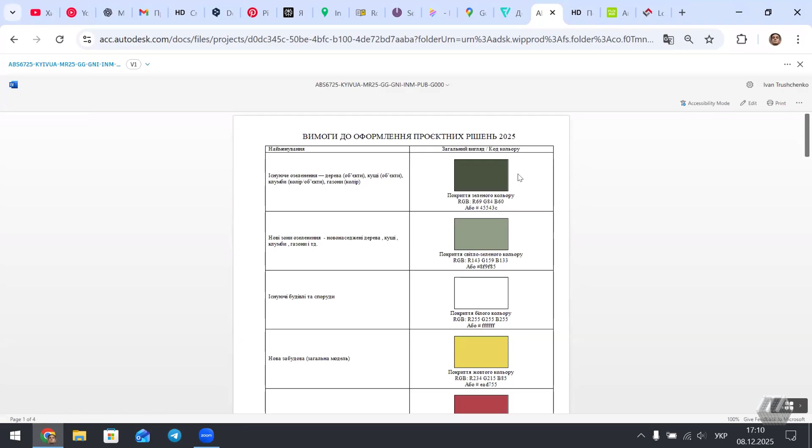Work on the project was accompanied by the creation of additional rules, such as the color scheme. I would like to show you these rules. Here we have color rules which students were using to format their files.

Next, there were rules for naming files and the culture of maintaining the working files in the work process itself. So here we have some rules for naming, and as you can see, for example, we can open some folders, and here we have this naming as an example. So let's move further.

Now that we have reviewed the basic structure of the work process, I suggest we look at the overall results. Here I will show you the accomplished model of our work. We will start from the very beginning.

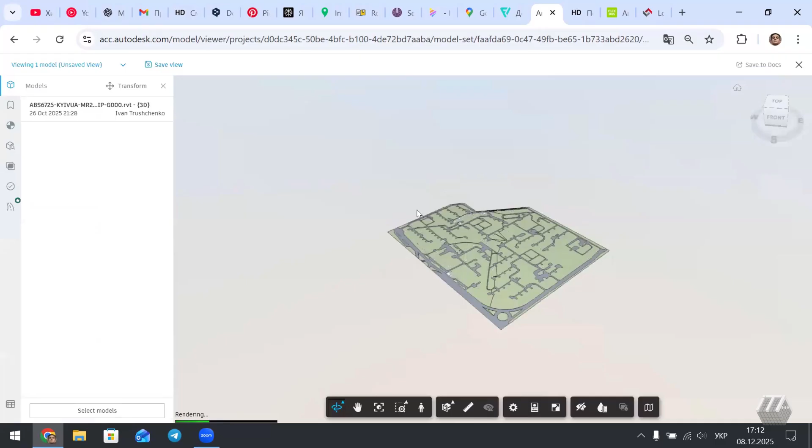Let's start with the starting point, where we have a model of the current state without changes. So we have there the situation itself which we have in real life - this is our district, the stage from which we began our work.

The next stage of the work for the groups was to identify problem areas and propose changes. We started with the demolition of problematic elements, problem areas that are proposed. I will show you this as an example - problem areas proposed for demolition are highlighted there in red color.

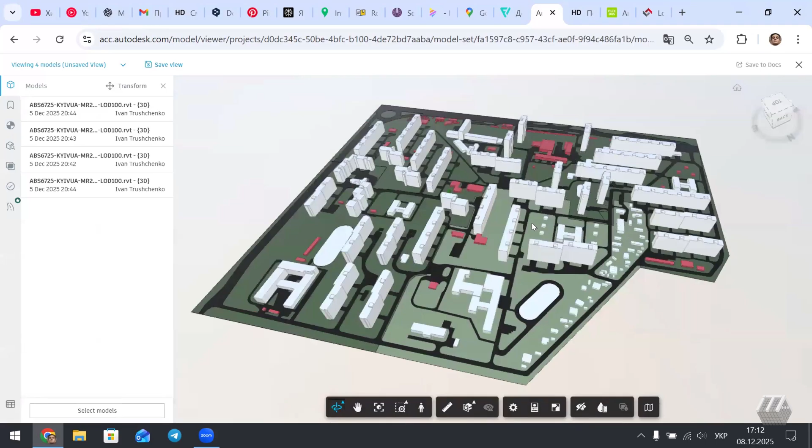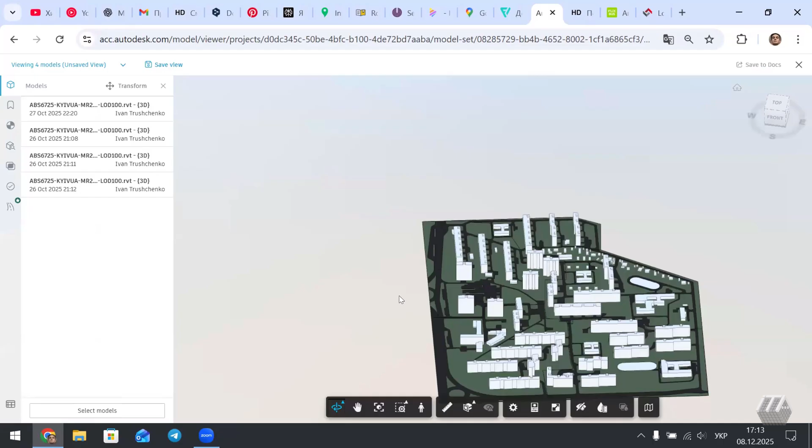This is our district again, with the problematic buildings highlighted in red. In the next file - it's taking some time - we see the situation still without changes, but already without the demolished buildings and structures, so without the red buildings, just the situation.

After this stage, each group began working separately. I suggest briefly reviewing the general models, and my fellow students will tell you about the details further. Let's start from LOD 100. What is LOD 100? This is a model that has not yet been agreed upon.

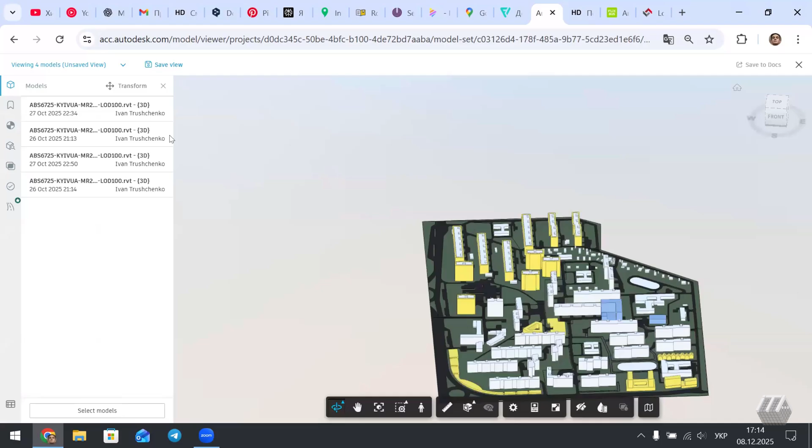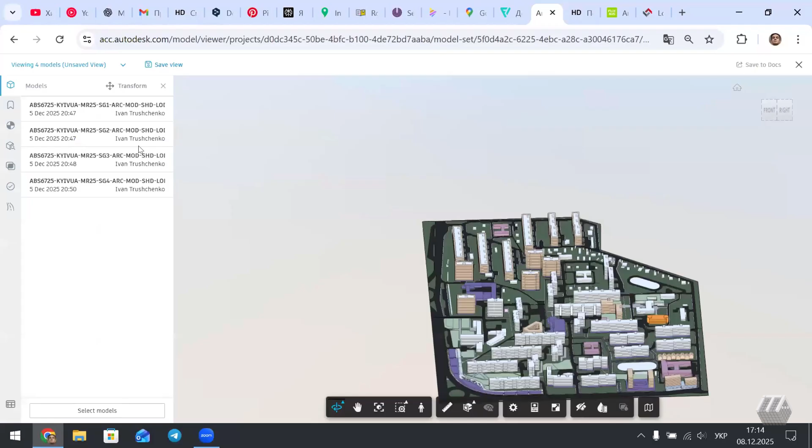At this stage, rules for maintaining working files and color schemes were introduced with minimal detail. The next stage was LOD 200. LOD 200 is an already agreed model with a medium level of detail and functional proposals.

Different color means a different functional proposal, which you can see in the rules document. And the last stage is LOD 300. This LOD is a fully debugged model with its own classifier and calculation of proposed changes.

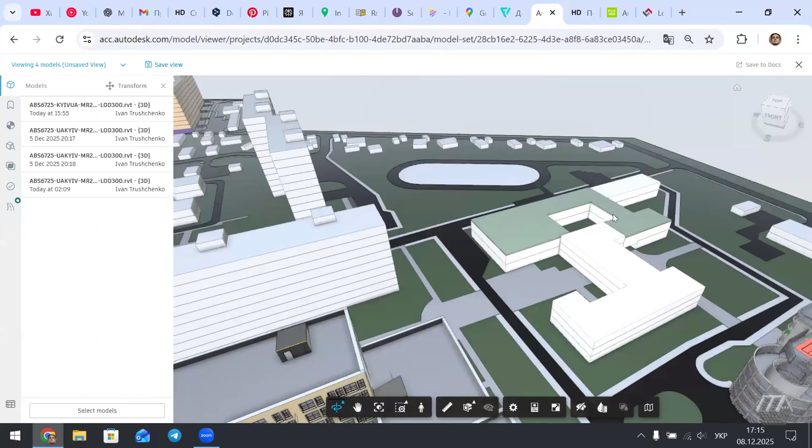I will show you the detail of these elements for LOD 300 of different groups. These are the structures that were in the work process - like this, and like this. And about the calculation, let's talk about them.

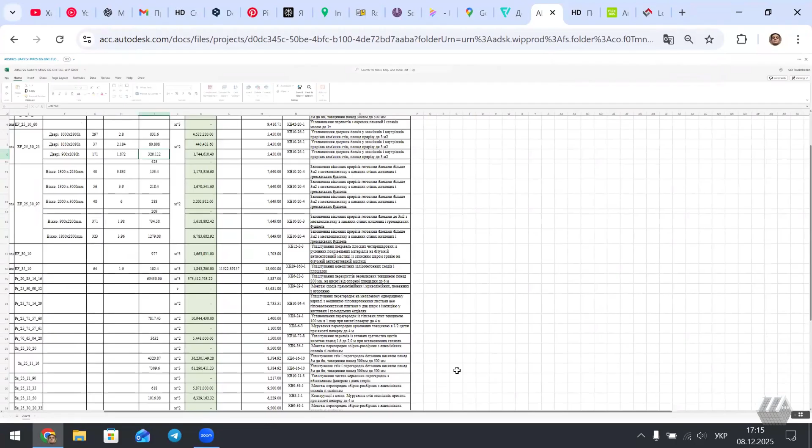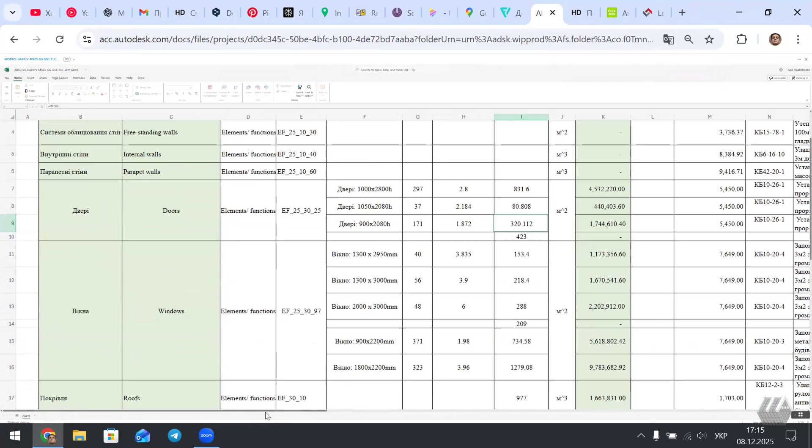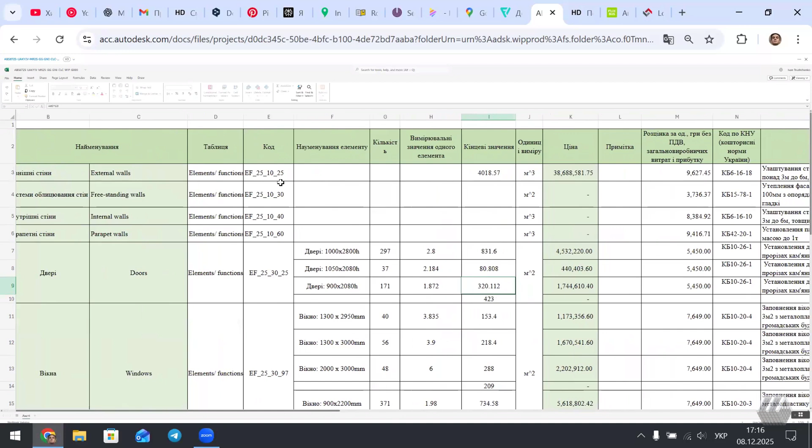So we have there the names of our elements, the code naming of these elements, and these elements we can see in the files. The calculation is in these separate files, where you can see both volumetric and numerical data, as well as the names of the corresponding classes of model elements, as I said before.

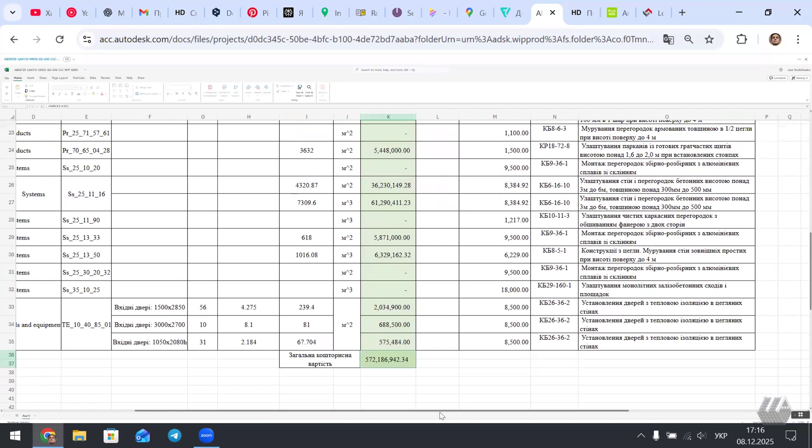And in conclusion, we have the overall volume of our calculation, and like this we have some conclusion. Yes, for this, in my words, that's all. My colleagues will tell you about more details of this project.

Okay, and who will be the next? While we are waiting, I want to tell you that this work was done in 10 lessons, and it was a little hard for us because we tried to work on such urban projects with first-year students. Masters have more lessons, near 14 lessons. Last year we worked with this group, with Makariv, and they worked on public spaces. Because they had that experience and understood BIM technology, we shortened the number of lectures and made more practical lessons.

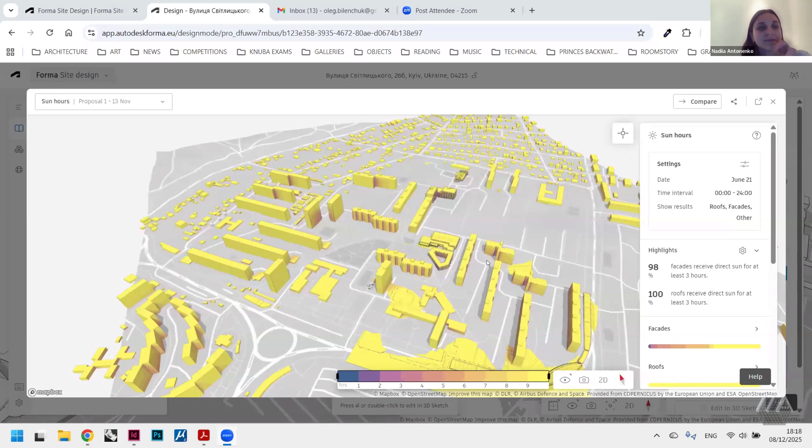Before we switch to our site, I wanted to demonstrate our quick acquaintance with software called Autodesk Forma, which was kindly introduced to us by Dmitro Makarov. Thank you very much, Dmitro. It's really quite an impressive piece of software. What's so particular about it is that it does really complex calculations rapidly, instantly, and it's a browser-based application, so you can open it in Chrome, Microsoft Edge, or whatever.

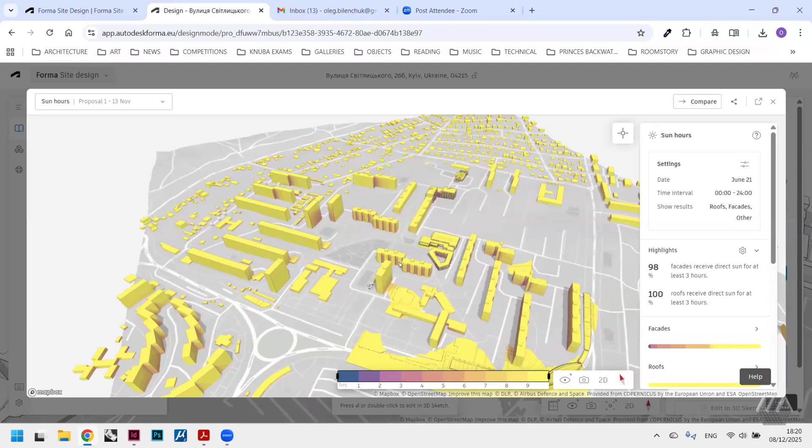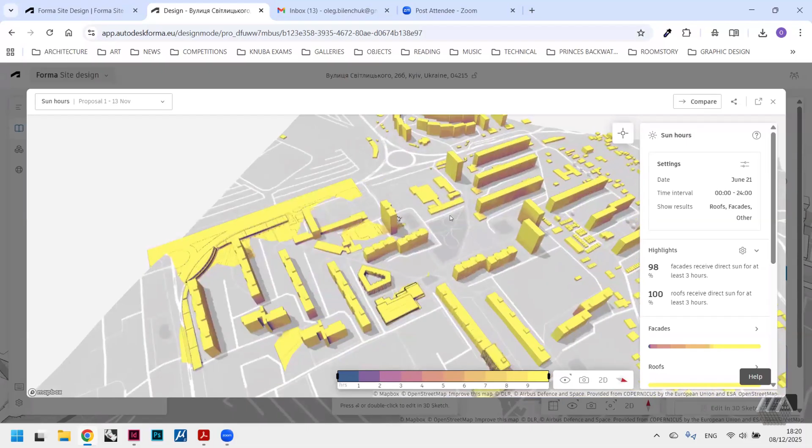We tried to locate our overall model as precisely as possible in order to make daylight simulation and wind simulation. What's on the screen now is basically a 3D model of all 4 sites, so it's a cumulative proposal. You see all the buildings. There are little bugs, but it's just to get the gist of how things behave climatically. It's a great tool, I think, to really test things from the point of view of daylight, wind loads, and other things. It has a very deep specification engine. You can actually specify functions, which we didn't do.

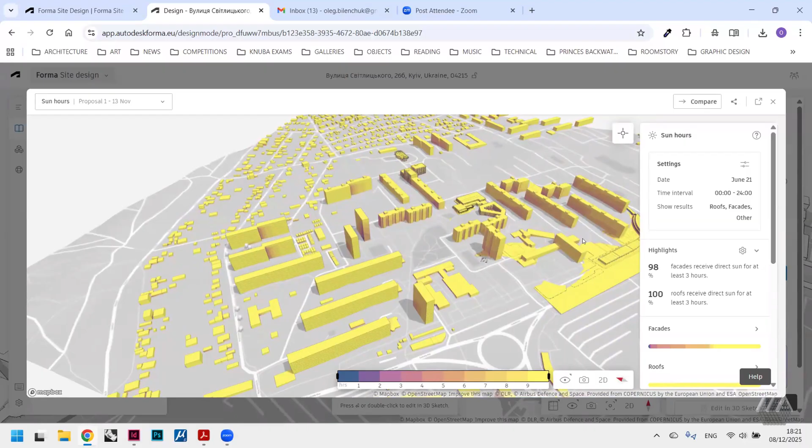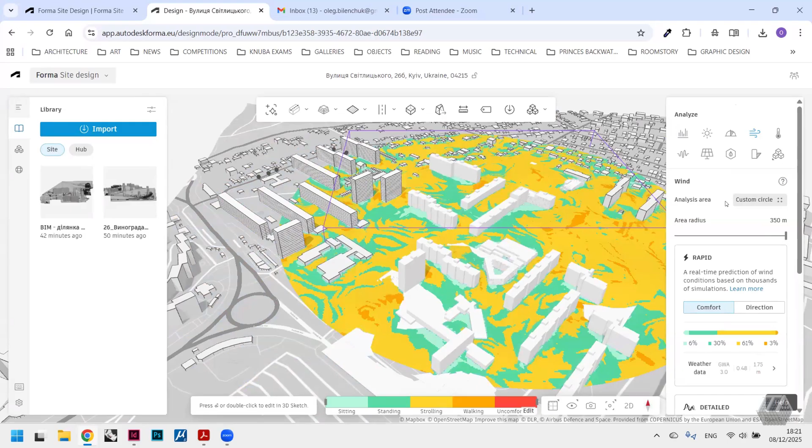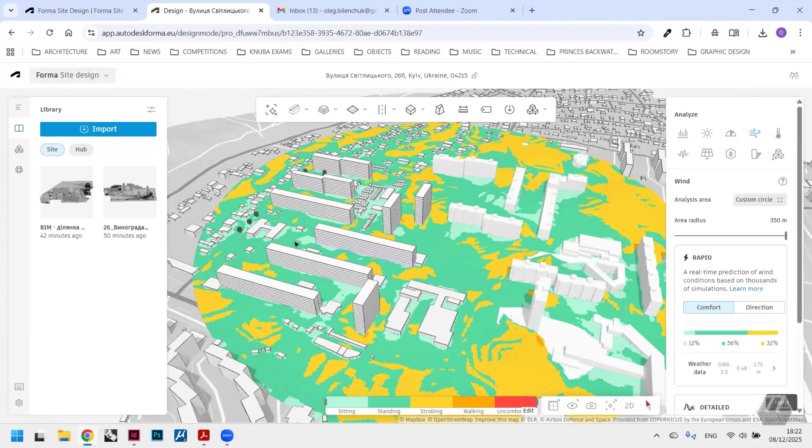So we only ran sun hours data analysis, and then I'll quickly show the wind analysis. You can see it calculating live, basically, and you can set a custom radius for the calculation area. It's very easy to relocate it and recalculate the specified piece of land, and instantly get data. So it really allows you to test how things are in relation to the proposal. Since we didn't change much of the morphology on the existing site, we weren't really using these two modes of calculation at their full potential. So I guess in our case, we would have to dive deep if we had more time to specify all the functions and really get all the metrics. But yeah, this is how it is at the moment.

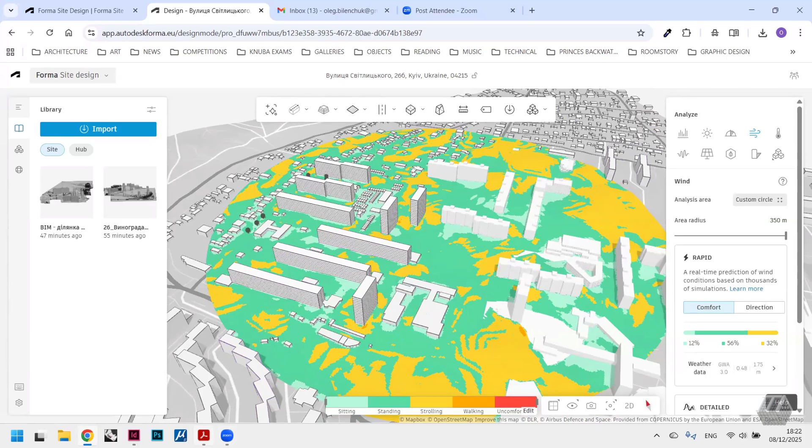So we've got two principal calculations. Now I'm going to pass the word to Victoria. She will start with lot number 1, with the proposed ideas and concepts. One second.

Hello to everyone. I can start. Do you attend? Okay, it's fine. In the meantime, I'm going to take over.

Our presentation is split into 3 principal chapters, which are where, what, and how. In where, we talk about the site, found historical maps, and give a gist of the general context. In what, we demonstrate the taxonomy of the buildings, basically the body of buildings which we've worked on and focused on. And in how, we present 3 key concepts to our project, which are the concept of wrapping, the concept of stitching, and the concept of superimposition.

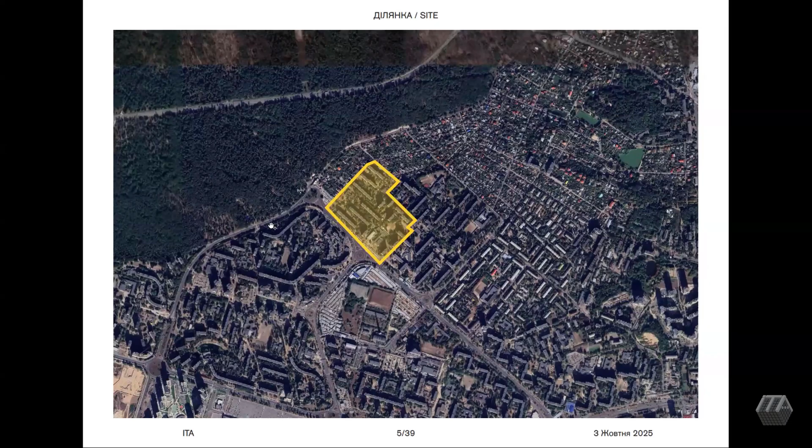Here you can see the enlarged satellite image of Kyiv. What's peculiar about the site is that it's really at the edge of the city. Just to locate things, here is the central historical part, this is Podil, and this is Vinohradar. So it really has this edge condition. Beyond it, it's just forest, basically. Here's a bit of a zoomed-in image of the site highlighting our sector.

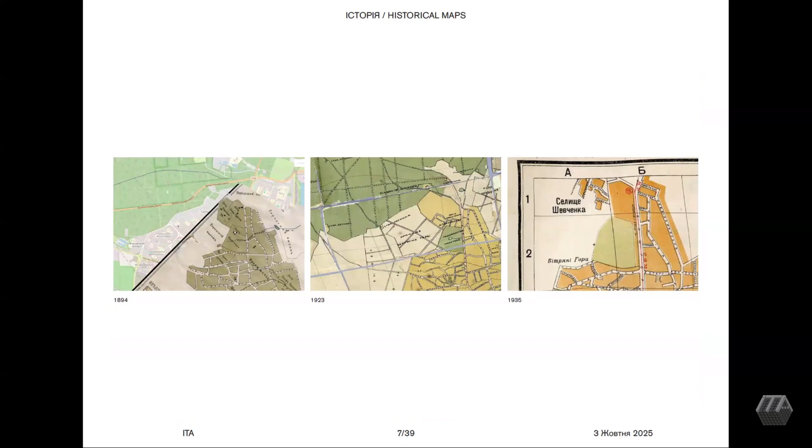And 3 historical maps showing 3 periods of this site's development, which was really a rural territory. Not much was going on. It was a mixed kind of land, sand, and land for cattle and fruit gardens. Then during the Soviet period of mass construction, it really became, let's say, a factory for a new kind of mass-produced urban development. All the residential blocks had a monofunction, which was exclusively housing. So there was housing and infrastructure, civic services.

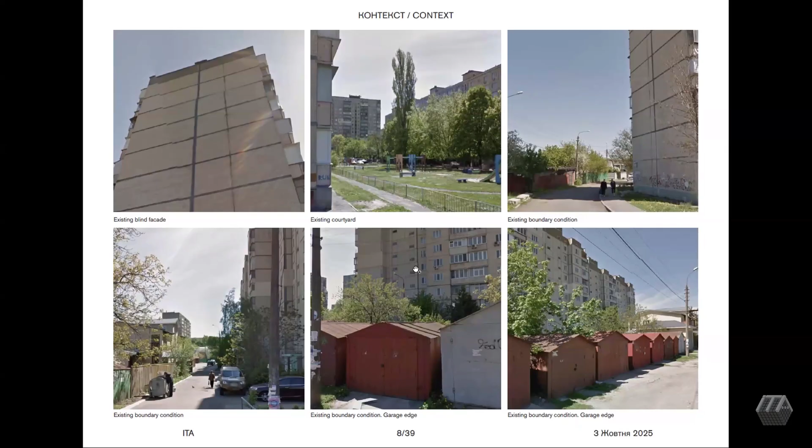And then, opposite to the Soviet project, there is this modern project which is very similar, has a very similar scale.

It's just using more contemporary ways of building buildings, taller, bigger, but with slightly more infrastructure, civic infrastructure.

What's also interesting about Vinohradar and other similar houses across Kyiv is that, if I remember well, at some point during 2014 or 2016, there was a law that allowed residents to quickly change function from residential to commercial, and people really took advantage of that, and it became a tendency. So ground floors started quickly transforming into what was thought necessary there, which is on one hand kind of an entropic thing, but out of necessity, I guess.

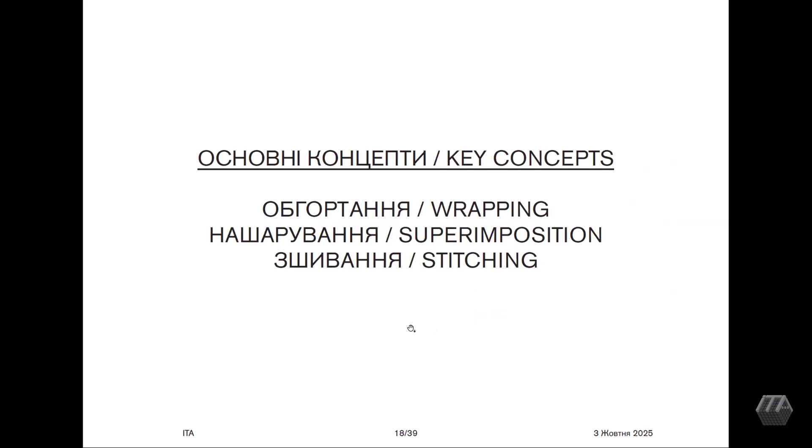Our key concepts were wrapping, superimposition, and stitching. We looked at the glorious project by Lacaton Vassal, the transformation of 530 flats.

Something wrong with your sound? We don't hear. Sorry, I beg your pardon.

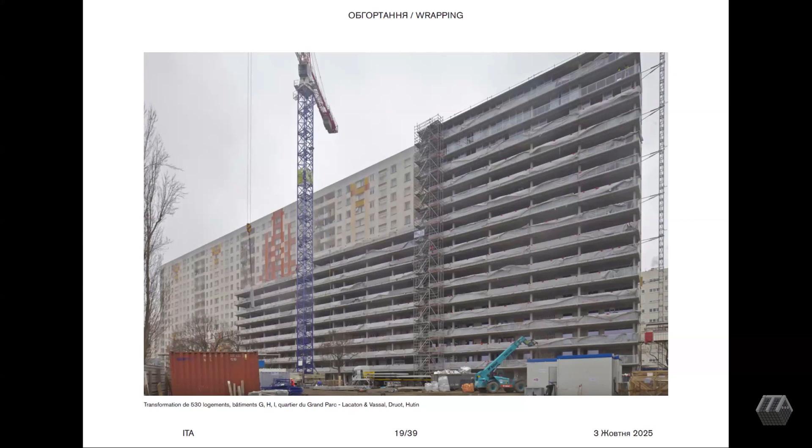Transformation of 530 flats in Quartier du Grand Parc. Some other photographs of this incredible project. It was basically a Plattenbau building, which was brilliantly renovated by French Pritzker Prize laureates.

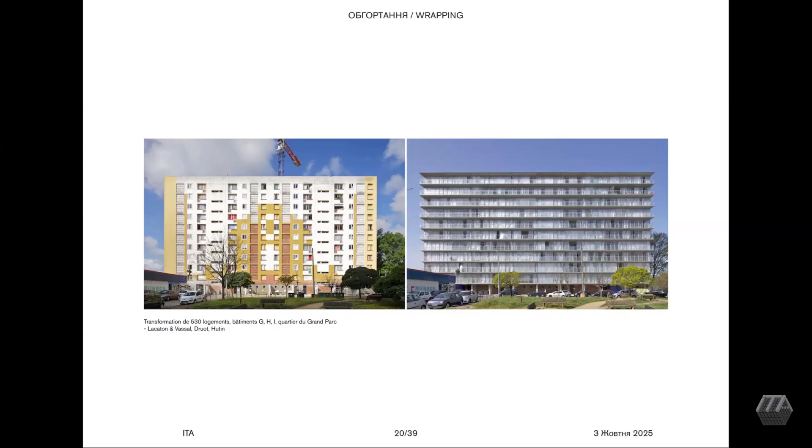And what they did, they basically added the facade, but at the same time, to my mind, they removed it by this gesture. Because here you can see the original facade, which has this composition of windows and other elements, so it has a really strong facade presence. Whereas Lacaton Vassal really abstracted the facade to the most radical level, and they turned the facade into a space, which is really a beautiful and poetic idea.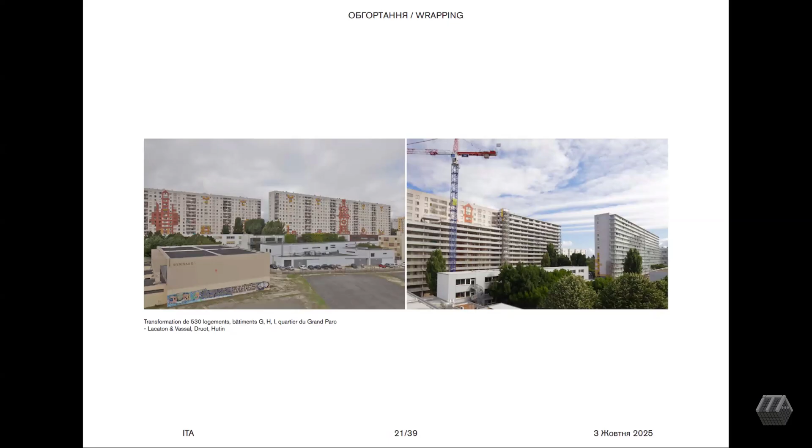And to this extent, we think of this project as almost like a paradigm of what to do with this type of house. Of course, it requires state funding, etc., and climatic assessment, but anyway, I think it's a brilliant precedent.

So we tried to come up with a similar idea, but with a slightly different treatment, because the war really impacts everything, literally. So we couldn't avoid thinking about this factor as well.

Unfortunately, this type of building is considered to be quite unstable structurally during an impact. So we thought, what if this second skin, this added space, could also serve the function of protection to some extent, and the possibility to share energy.

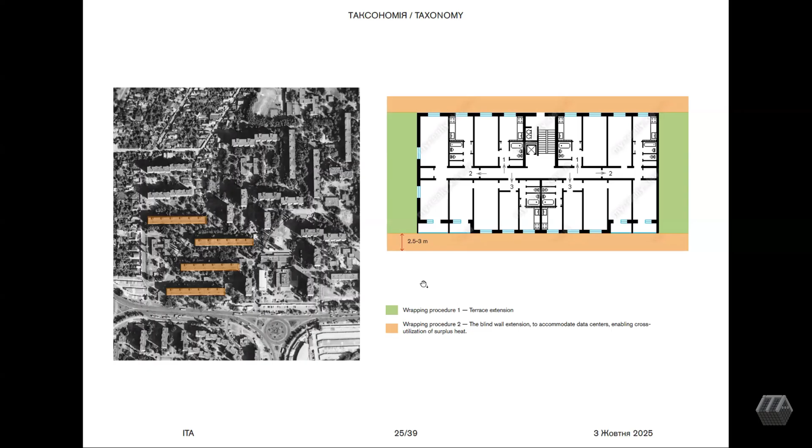So on one hand, you have a blind wall, which is usually used in this context as a space for adverts. So instead of using it as a space for adverts, we propose to turn it into something that could accumulate energy, something that could be beneficial both for private interests and for people who live in these houses.

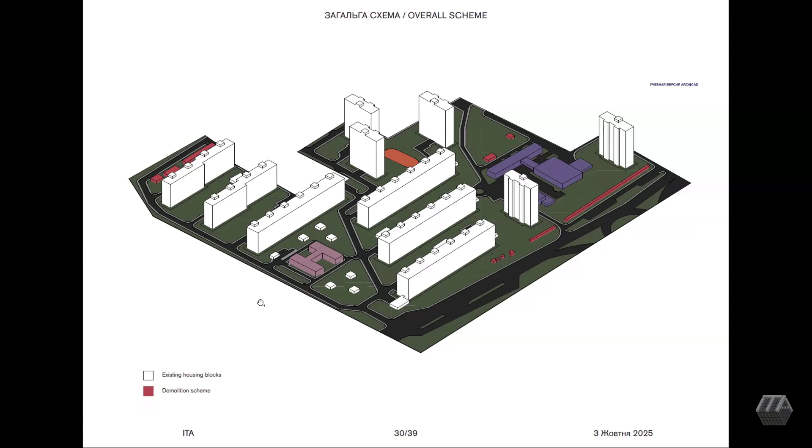And this is the overall scheme showing the existing condition, then a partial demolition scheme, which touches mainly chaotic and illegal structures across the avenue, and some garages. And then the overall proposal scheme, which shows the idea of wrapping with an additional structural grid.

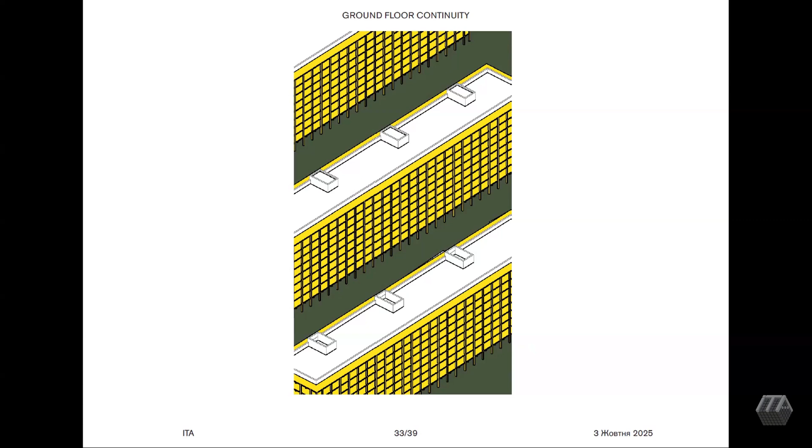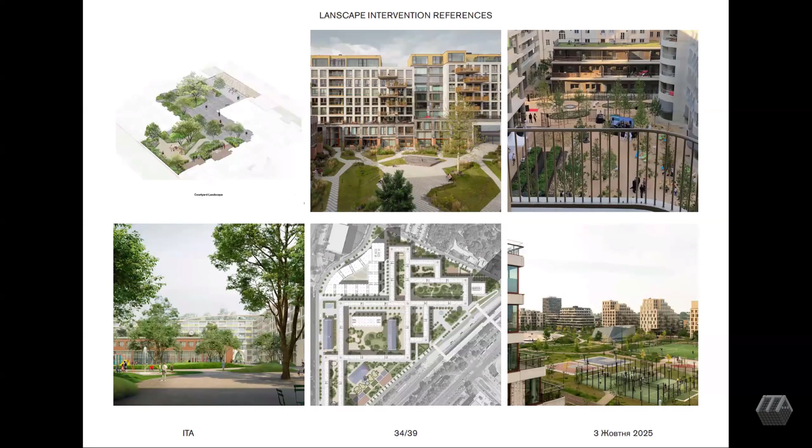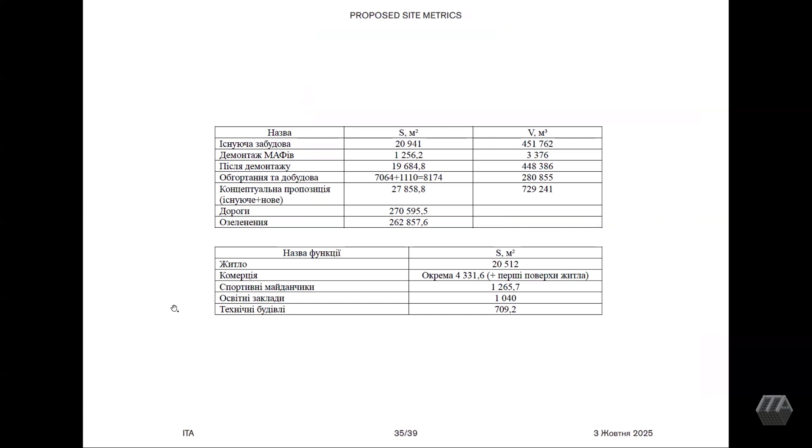And then coming to the idea of stitching, which was again addressing this notion of safety, so that people do not see Plattenbau anymore as something dangerous, something that could collapse easily, but something that has this character of support.

Unfortunately, we couldn't come up with a concrete calculation because while liaising with a structural engineer, he told us that in order to calculate impacts done by explosions, you need a super powerful computer because you work with fields of particles and energy, and it really takes enormous time.

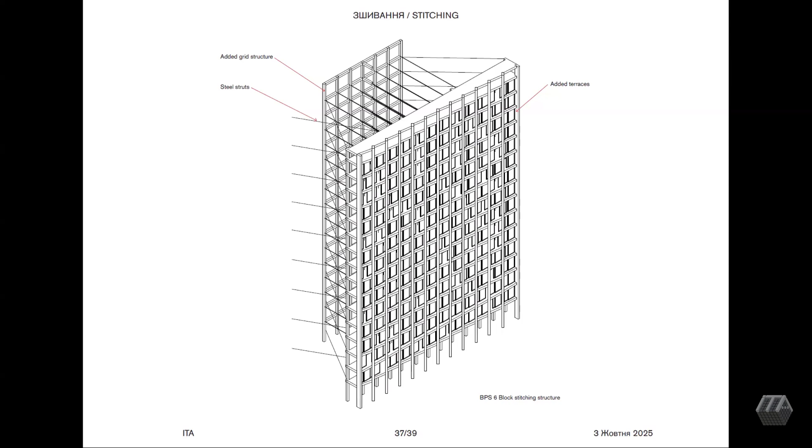But he said that in theory it could be a very interesting idea, and even pushed further into the idea of a car-like airbag system, so potentially it could have some pneumatic elements to it. But again, it's a project within a project, and although it takes a long time to really prove its viability, it is quite viable from our and the structural engineers' point of view. Of course it's not instant, which is probably a bad thing. But anyways, we never know how long these buildings would last and how long the war would last.

So this is the assembled look of the outer structure. Here you can see these vertically stacked data centers, or something that could produce surplus energy and make cross-utilization possible, on the example of the BPS 16-story tall block.

And then the last concept is superimposition, which is about the commercial part of our site. What's particular about urban planning in those days is that it was radically different from European thinking, which evolved from medieval tradition, where commercial functions and merchants were on ground floors. Obviously this is very alien to Soviet thinking, and especially to Plattenbau.

So they had this idea of a community center, which wasn't really a community center in our understanding. It was just a place where all the services were, like if you need to stitch your shirt you go there, there was a post office, a hairdresser, so it's basically a service center. Nowadays it evolved into a place where people just rent out spaces to provide the same services. Our idea was to keep all the functions that are there, because if they are there, it means tenants survive, they're able to pay rent, and tenants and residents really use those services.

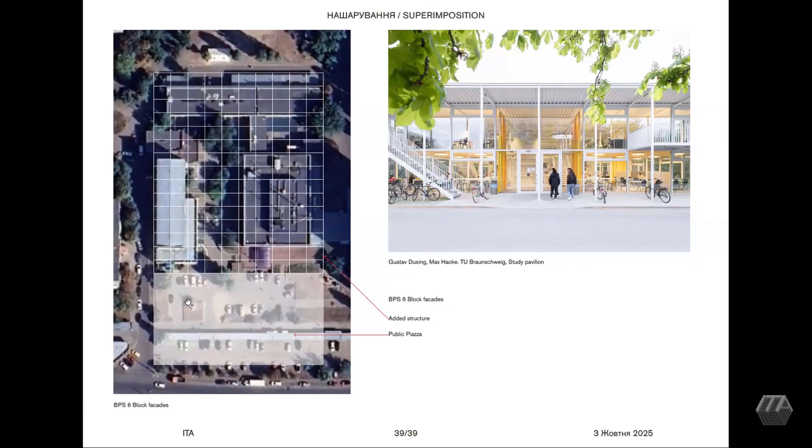So our idea was just to renovate using, again, this concept of a grid, but this time not concrete, but steel, something very elegant that could be superimposed literally on the existing structure and provide a new layer. So basically to use the roofs and to rethink these inner garden bits, this alcove, and to turn this chaotic parking lot area into a public piazza. Thank you for your attention.

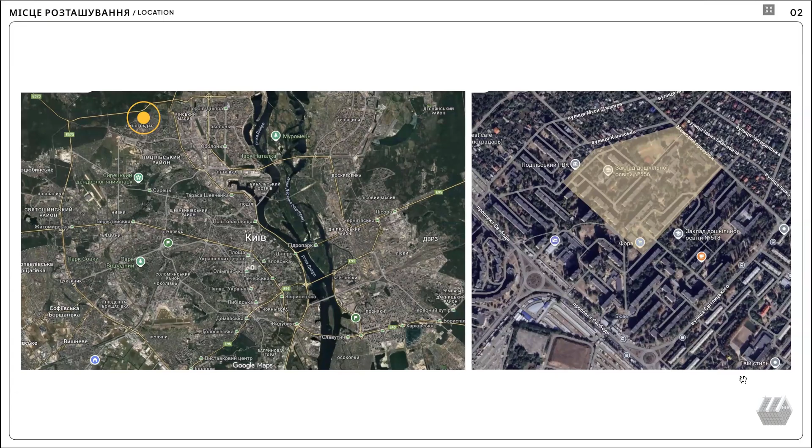So let's start. We have worked on Vynohradar residential area located on the northwest outskirts of Kyiv. The photo on the right shows the site my group worked on. Our site mainly consists of Soviet-era prefabricated apartment buildings, 2 schools, a kindergarten, and a stadium.

After analyzing the territory, we found a shortage of parking spaces and public services. Therefore, on the demolition plan, we proposed removing the annexes that currently house the one-story art school, as well as several technical structures. This allows us to build several new residential sections with a public use podium and a separate multi-story parking garage.

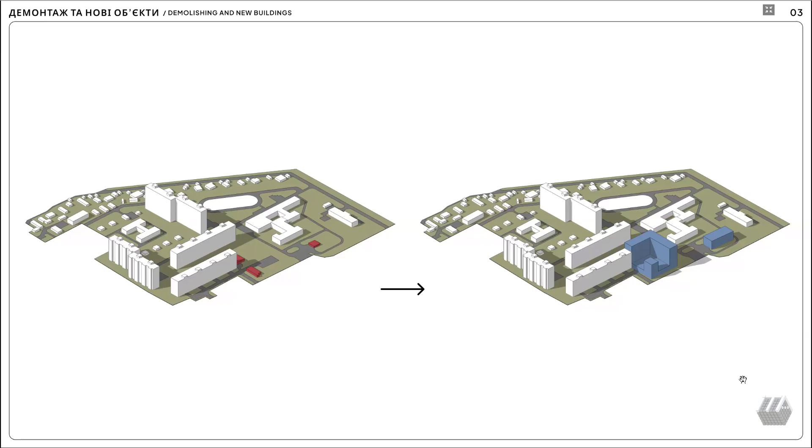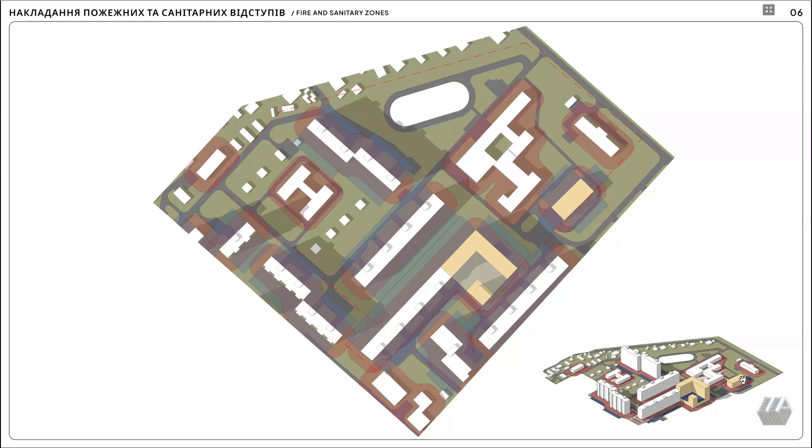According to the cadastral map, a large part of the area is occupied by educational institutions. So to compensate for the school territory used for the new parking, we propose creating an accessible green roof on top of the school. The kindergarten area cannot be significantly reduced, so it remains unchanged.

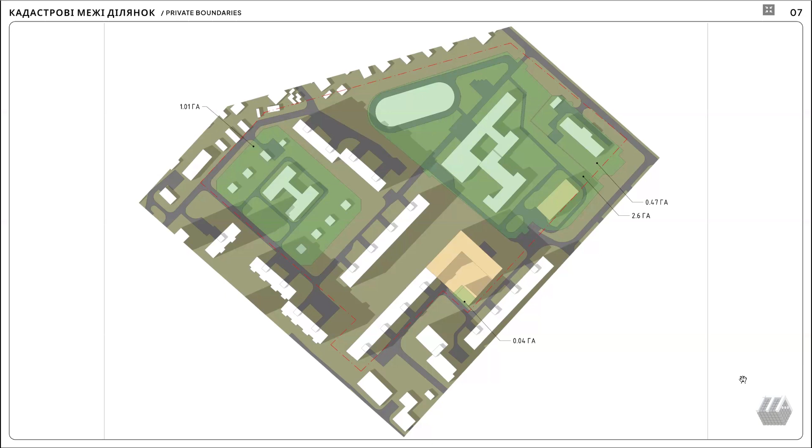Considering all site restrictions, we can build approximately 21,000 square meters of housing with integrated public facilities and 3,000 square meters of parking.

For the pedestrian and transport circulation plan network, we did not change the transit routes locals used to. When analyzing walking paths, we found no non-functioning paths, so we proposed a sustainable design solution, only optimizing the landscaping and adding more greenery.

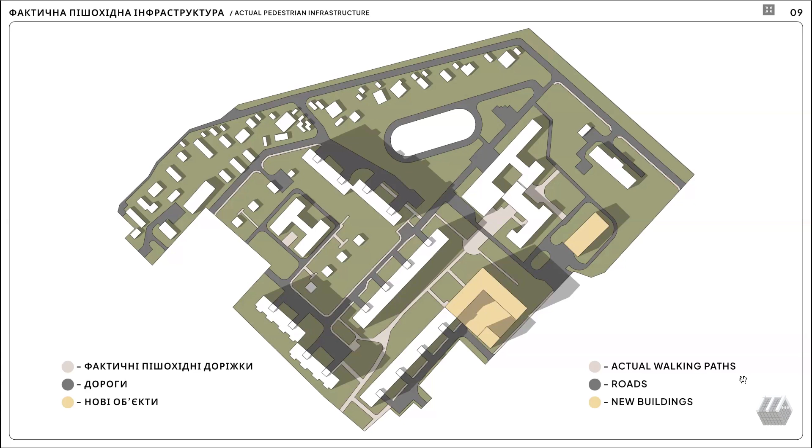The functional program includes 3 residential sections with accessible roofs, a podium with commercial spaces to meet local needs, and a courtyard for the residential sections located on the podium roof. Office spaces are on the ground floors under the residential block, a 5-story parking garage, and renovated cultural facilities, including the art school expanded into an art gallery.

We use green roof systems to reduce stormwater runoff and lower cooling costs in the summer.

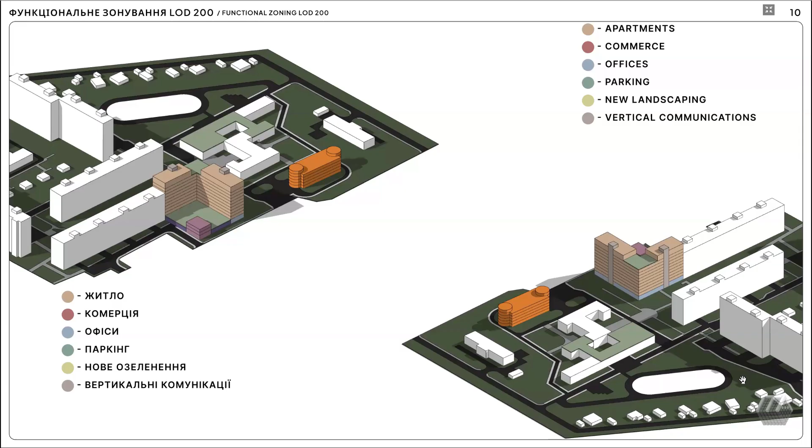These slides show our design solution at level of development 200. We worked out the facade and structural solutions, and organized all elements according to the classifier.

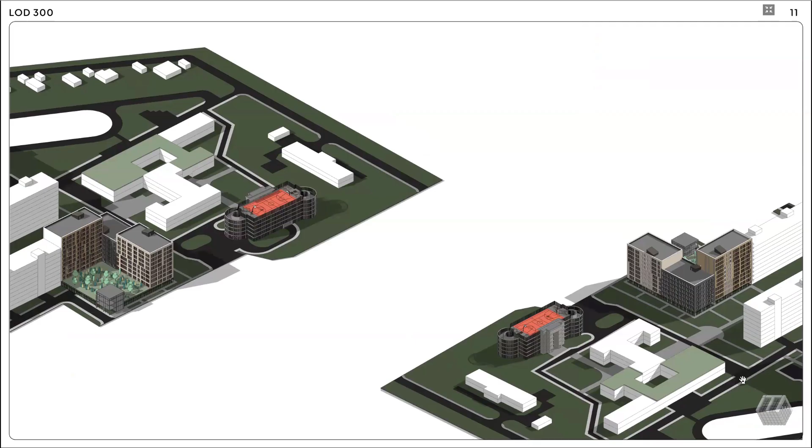The housing has a typical floor plan, where only the facade column grid changed. The apartments vary based on our analysis of the district's population - we have 1, 2, and 3 bedroom apartments.

2 sections use type H1 smoke-free stairs, according to Ukrainian building laws, with an outdoor crossing. The third section connects to the side wall, so it uses type H4 internal stairs. These stairs require a lower building height, so this section has 6 floors.

On the ground floor, commercial spaces and offices use the same column structure as the housing, plus a separate 6x6 grid.

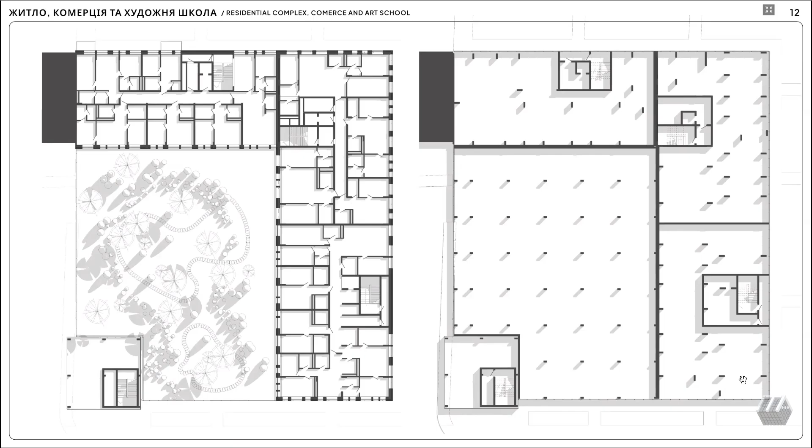In the bottom left corner, we have a 3-story art school with type SK1 stairs, according to Ukrainian building laws. The parking for 126 cars must have 2 ramps, according to Ukrainian codes.

After the last presentation, we listened to students from Austin and added a sports court on the roof to add more function to the buildings.

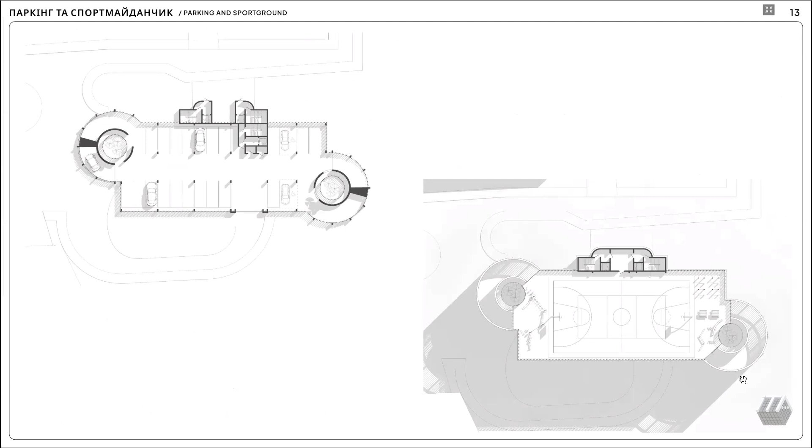During the design process, we considered insolation and sunlight requirements for both the schools and nearby housing. We checked this using Autodesk Forma software, and also did a wind analysis in Autodesk Forma to make sure our design did not create drafts that are uncomfortable for people. That's all.

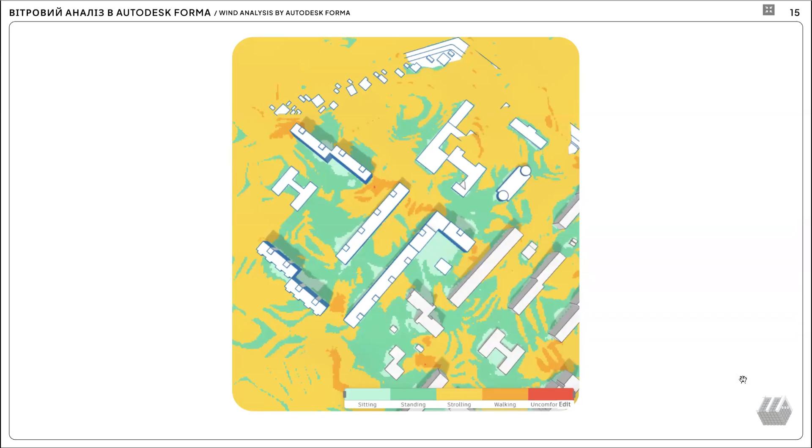Can you see my screen? Yes, I can. Okay.

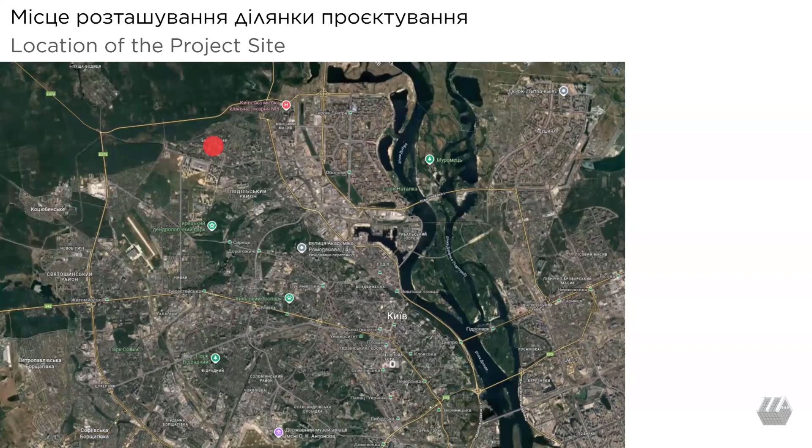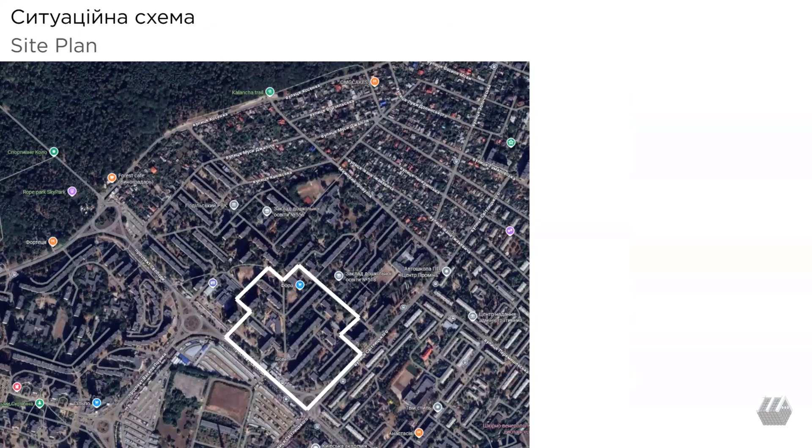With the help of Google Maps, we were able to take a virtual walk around our site. We can see that the area looks quite outdated and depressing. The facades of the buildings have chaotic extensions and glass balconies. The pedestrian infrastructure is poorly developed with no sidewalks or bike paths. There are many small kiosks here.

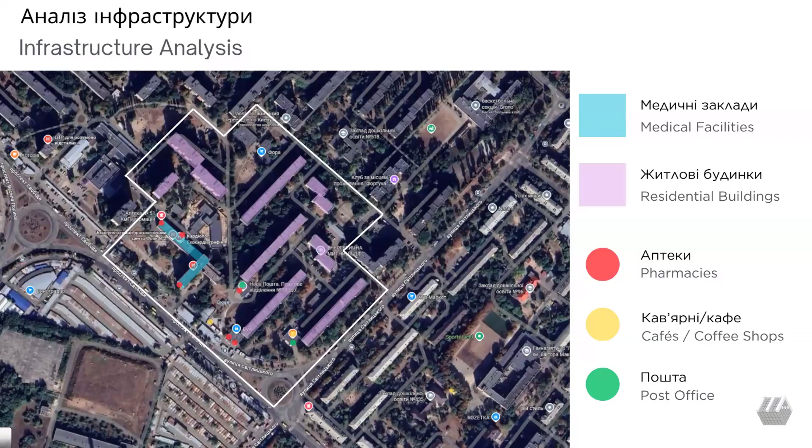The map shows the functional concept of the area: medical facilities are marked in blue, residential panel buildings in pink, pharmacies in red dots, coffee shops, cafes, and other buildings like that in yellow, and post offices in green. As you can see, we removed the chaotic commerce and added 2 large commercial buildings and 1 residential complex. We will look at it in more detail in the following slides.

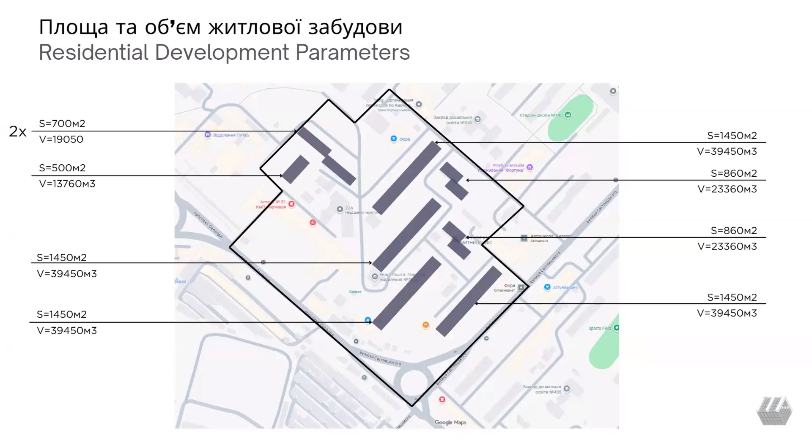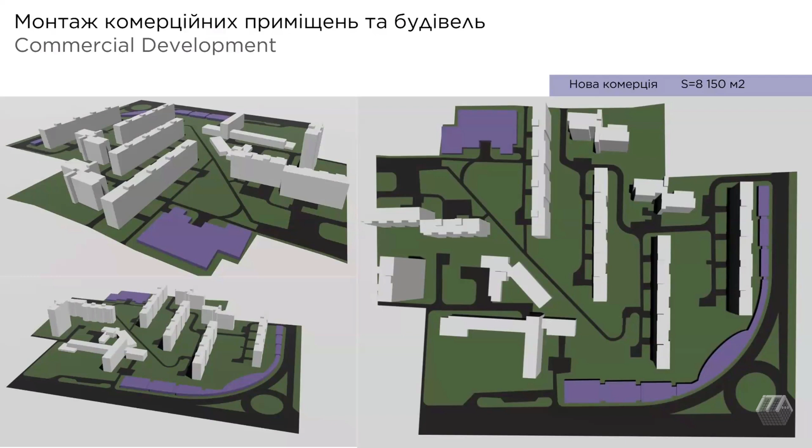And now about new residential development. We designed a few-story residential building with underground parking and a green roof.

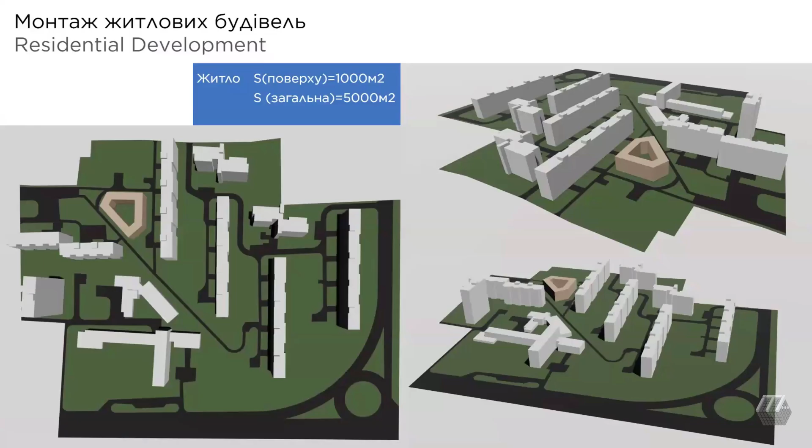In the center of the building, there is an atrium with an inner courtyard that includes a rest area, children's playground, and sport area. Each floor has 1,000 square meters, so in total we have 5,000 square meters of residential space.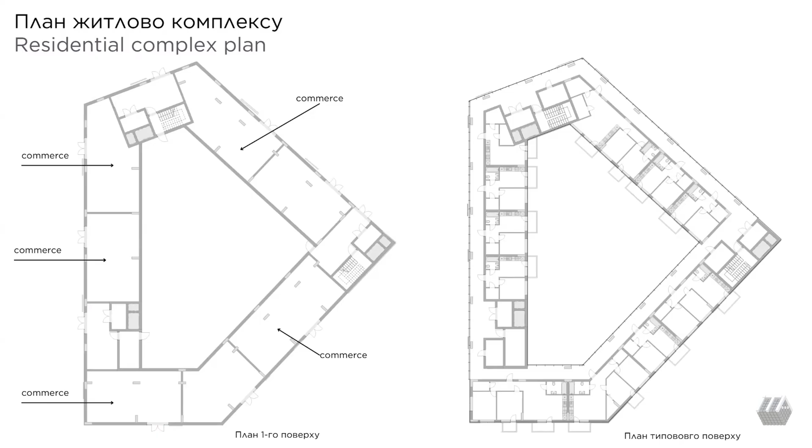We can also see the commercial building that we placed along the road. It helps protect the inner courtyards from noise, dust, and cars, and allows us to create a pedestrian promenade with cafes, shops, and other commercial functions.

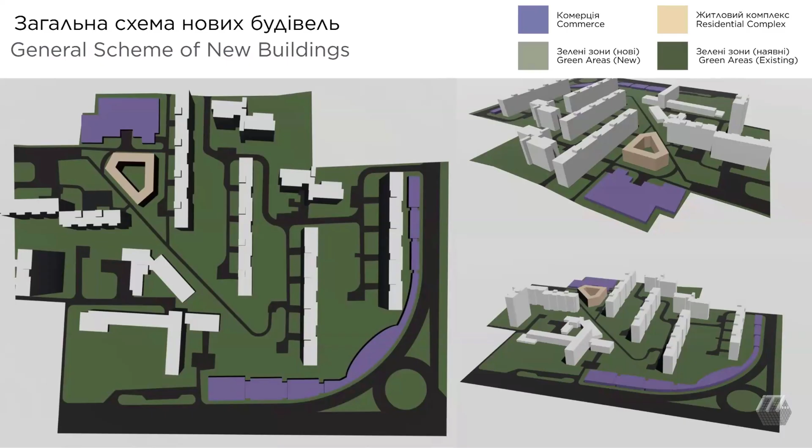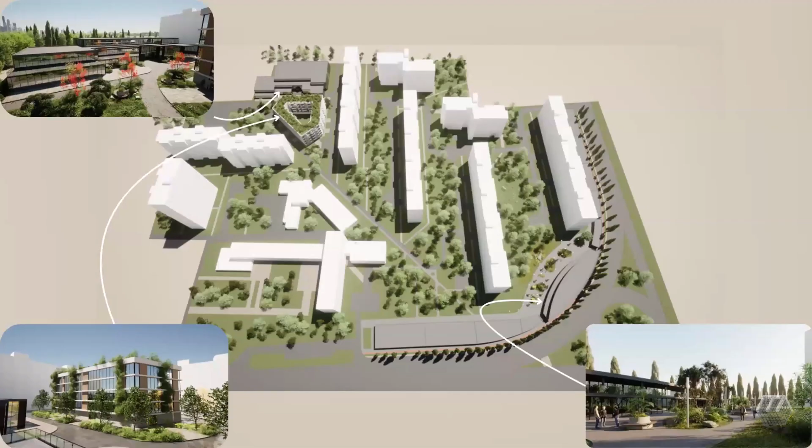At the next slide, we can see the proposal for the master plan, and next, on the renders, we can see the design of the commercial building.

The commercial building and its territory with benches, walk-in area, and plants. The commercial building has a simple form so that it doesn't attract too much attention and fits well into the general composition.

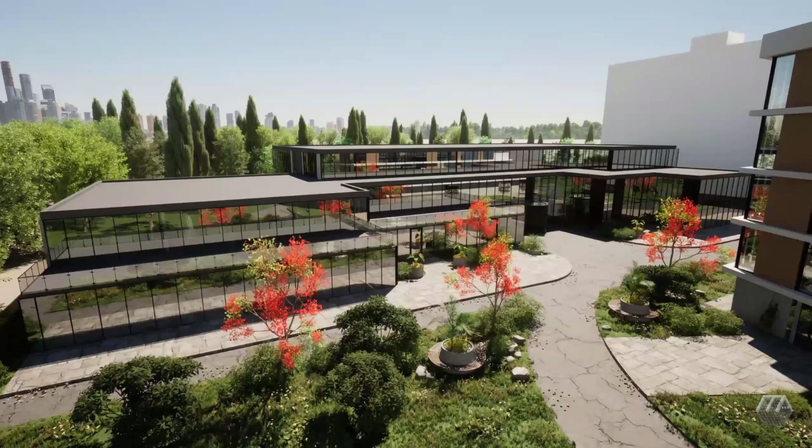Its facades are made of glass and dark black tiles. The second commercial building is also designed with dark tiles and glass panels. It has 3 floors and includes various commercial functions: an art school, shops, banks, hair salons, and other types.

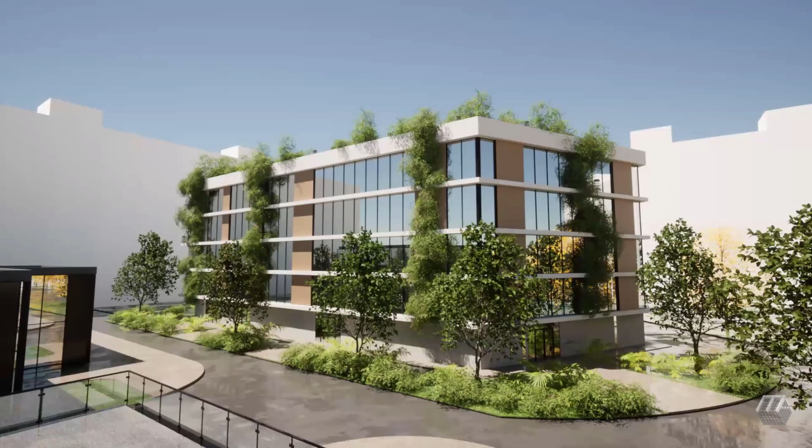The residential building itself uses light wooden panels, panoramic glazing, white decorative plaster, and vertical green walls on the facades. We can also see the landscaping of the street with many trees and plants. This creates a cozy and comfortable environment, reduces summer heat, and provides a pleasant view from the windows.

That is all. Thank you for your attention. Thank you.

And our group. Next. Okay, one second. I can see. Yes, okay, good.

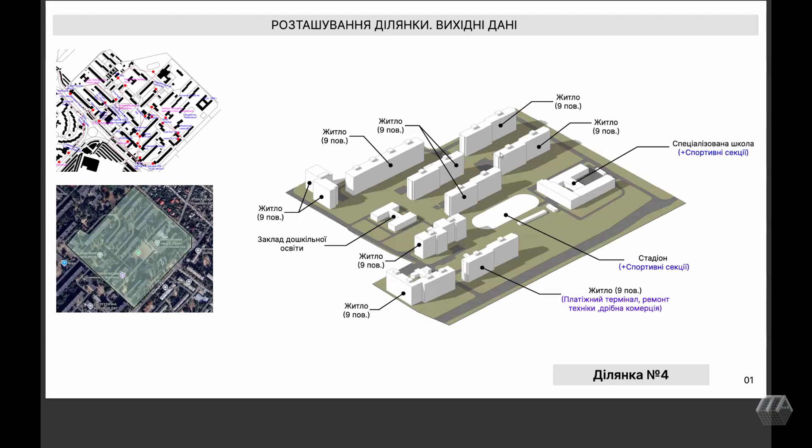In our work of forming a new vision of Vinogradar, we thought not only to show a hypothetical reconstruction of the space, but also to build a holistic model of what this district could become in the near future. The basis of development was a 3D model with several levels of detail, which allowed us to study the territory both at the scale of the district and in the context of individual architectural elements.

On the screen, you can see our analysis of the situation in our district. Next is about the problems of our area, site issues and challenges. The analysis of area number 4 reveals several key urban problems that negatively affect the quality of life and spatial environment: chaotic parking, lack of green and recreation spaces, limited transport accessibility, high traffic load on nearby streets, insufficient public amenities, and outdated infrastructure.

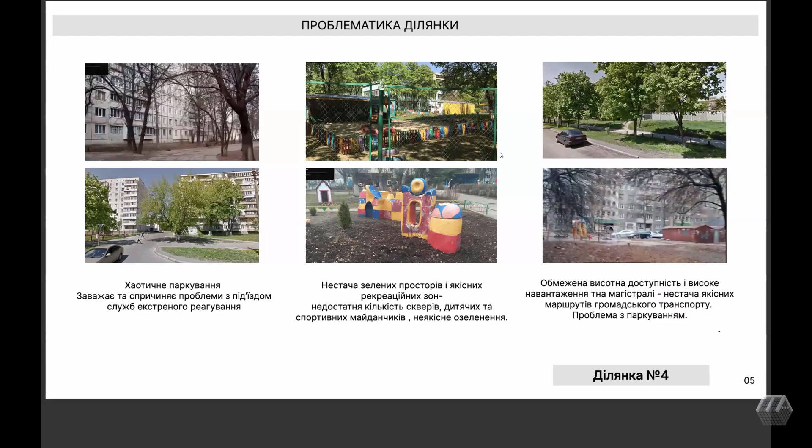These issues highlight the need for spatial reorganization, improvement of landscape quality, and better integration of mobility and community services.

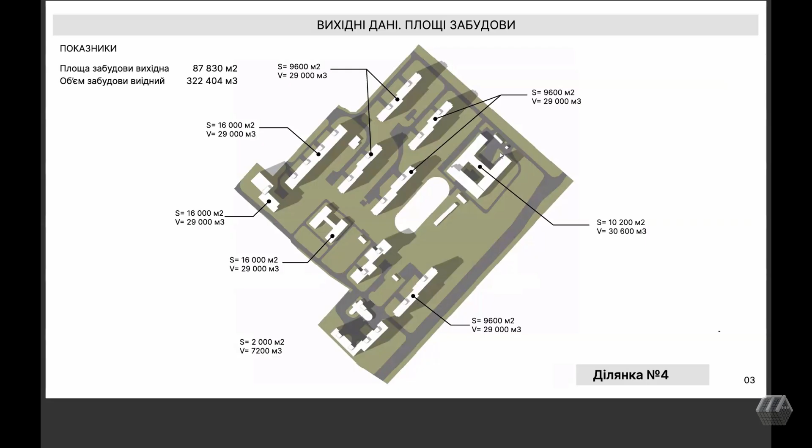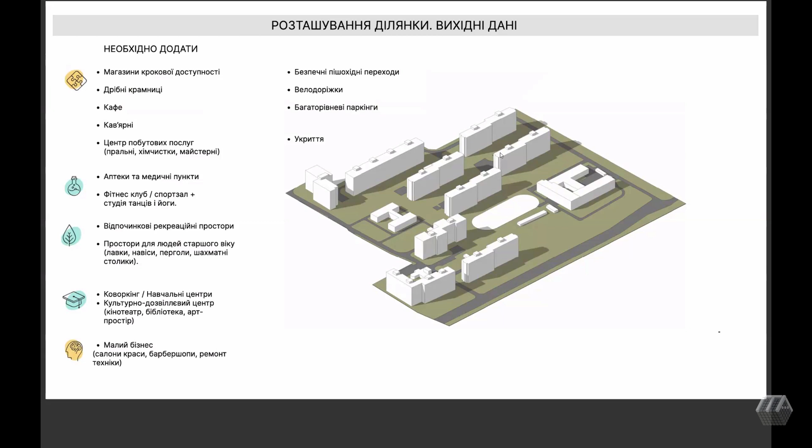One of our key tasks was to rethink the structure of functions that modern Vinogradar chronically lacks, from local shops to cafes, from leisure spaces to basic services. Instead of chaotically placing these elements, we concentrated them into a single multifunctional structure, which we can see on this screen, this big building.

These two big buildings were our main proposition for the functional enhancement and urban infill.

We placed the main functional areas that were missing according to the analysis into a single multifunctional center. In terms of the scale of development, we deliberately increased the number of stories of individual buildings to create a logical gradation of the urban profile and strengthen the visual composition of the district.

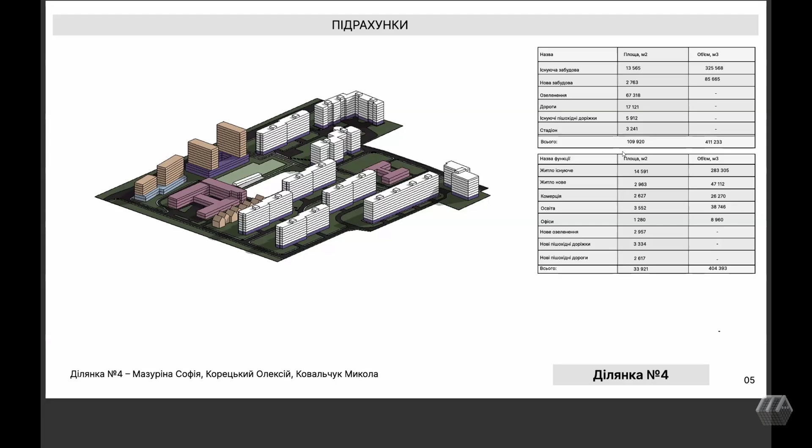In the next slide, you can see our calculations for this area. Total area is more than 110,000 square meters, and more than 400,000 cubic meters, if I'm not mistaken.

In the development of our site, we paid the most attention to modular prefabricated townhouse construction: high speed, low impact. In short, using modular assembly for fast, environmentally friendly, and more affordable housing, good for filling large voids.

Application for Vinogradar: fast implementation of housing and services in the places where density needs to be increased quickly.

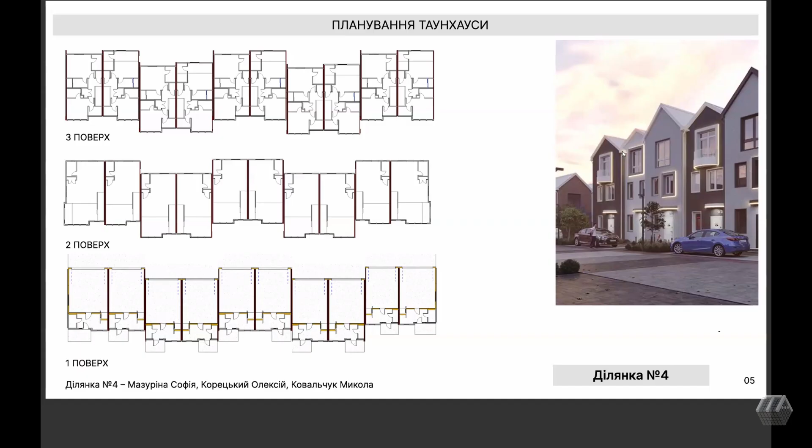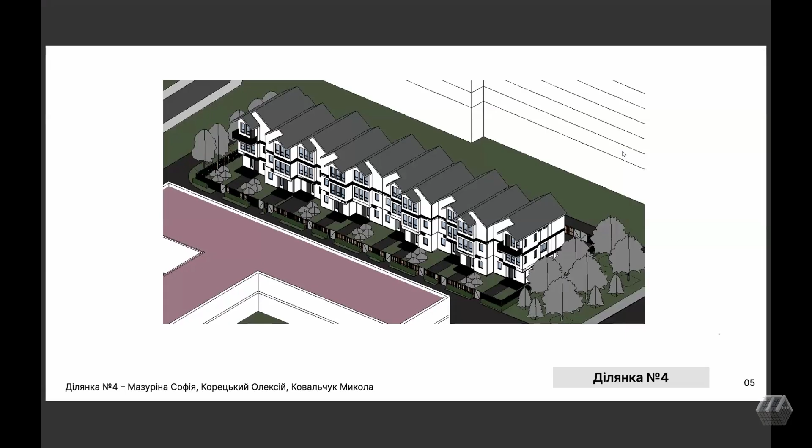On the next slide, you can see our model in LOD 300 from different points of view and enlarged, our townhouses, which we are working on more.

We placed a special emphasis on these townhouses as a segment, which gives Vinogradar the opportunity to balance the scale, to combine high-rise urban density with a chamber, more private residential structure. Townhouses create a smooth transition between spacious pedestrian areas and high-rise blocks, adding a human scale and comfort to the districts. This is the format that is able to attract a new audience of residents and revitalize the district socially.